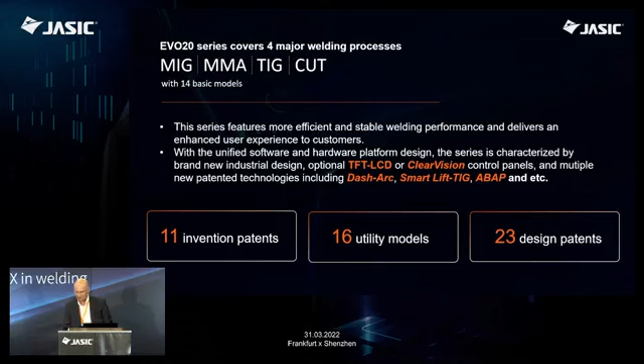Very important driver behind this development work was the human tech thinking. With the help of industrial design, the latest software developments, and the latest digital technologies, we aimed at creating an industrial design, user experience, user interface that will be the most modern, the most adapted in the world for welding needs.

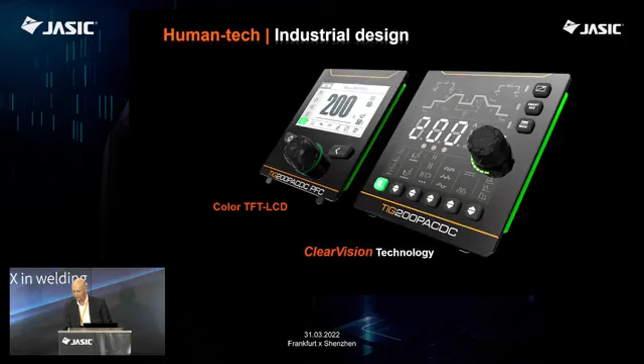We looked at how people look at the panels, the controls, how they use the equipment, not just saying it needs to be a little bit inclined. We actually asked the question, how many percent? What should be the slope? What should be the declination in order for it to be optimum for potentially as many conditions, as many situations as possible.

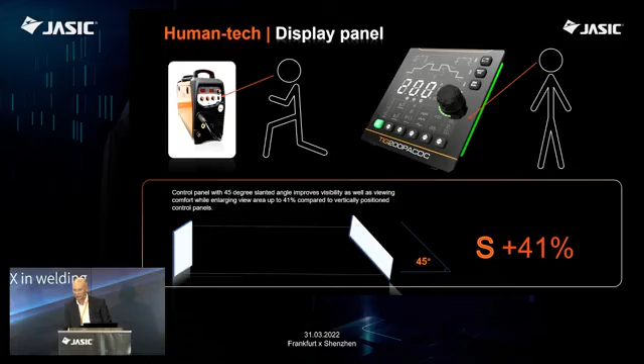A lot of attention was paid for the visibility of the parameters and controls. Welding is often done in dark conditions with the helmet on, with masks that are scratched, etc. Seeing is still very important because we know that a majority of welding problems happen with the start or with the ending. So the more visibility there is, the better it is.

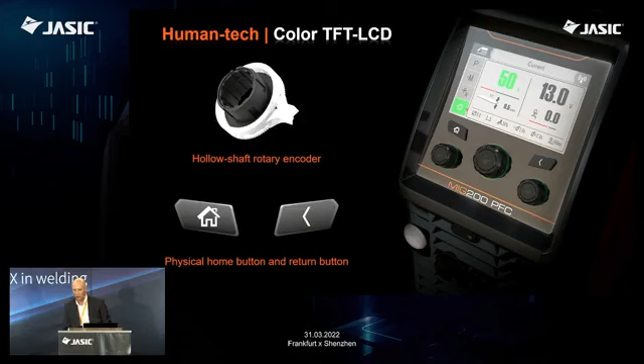High-definition digital displays are a standard in many products today. Why not in welding? But it's always a matter of pragmatical questions, and the conditions, etc. So there needs to be a choice between different kinds of applications, different kinds of technologies and different kinds of versions, if you will.

Remote controls have been around for a long time. They are wireless today, most of them anyway. Even the pedal can be wireless nowadays. And we offer a lot of different kinds of options for that requirement as well.

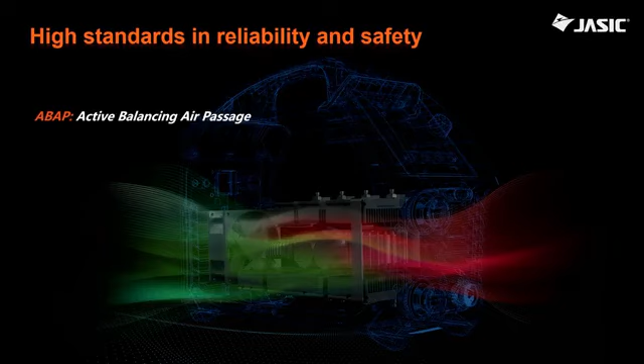JASIC has always had and enjoyed a good reputation in terms of reliability and safety. But development work never stops even in this respect. So a lot of new features, a lot of new innovations are in these products just to make sure that they will continue our tradition of high standards in reliability and safety.

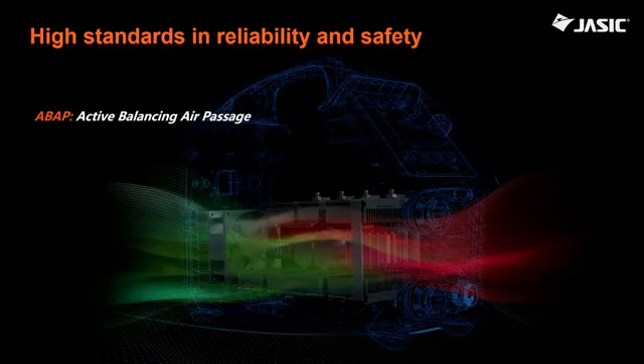It's true that single-phase products are easily transportable. They are meant to be used in different conditions, even outside, of course, with generators, and all the different applications. So when you design a top product, you need to look at it from all different angles.

Sustainability. Today on everybody's lips. What is sustainability? What is sustainable business? What is sustainable growth? It's not only the direct impact of your business to the environment, to the society, to the world, if you will. It's also the indirect little things that make a difference.

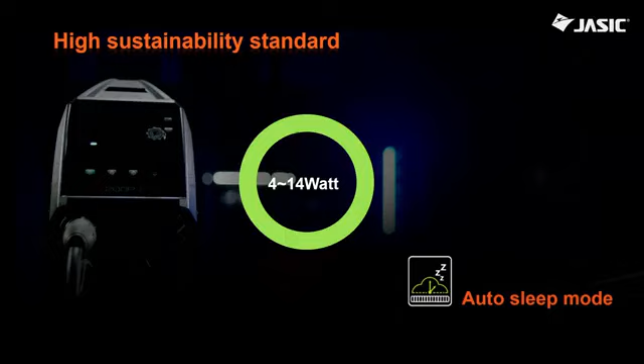The power consumption of the machine has been dramatically reduced when the inverter technology came about. But now we are even talking about LED technologies, new technologies that enable us to further reduce the energy consumption and thus the environmental impact. Auto sleep mode, an interesting one for panels as well, not just the ventilator, as it's more or less a standard nowadays. So there's always something more you can do if you want and if you set it as a target.

As mentioned, generator compatibility is very important. We don't control the performance of the generator, but we have to make sure that our equipment can work with as many generator models and variants as possible in a safe and reliable way.

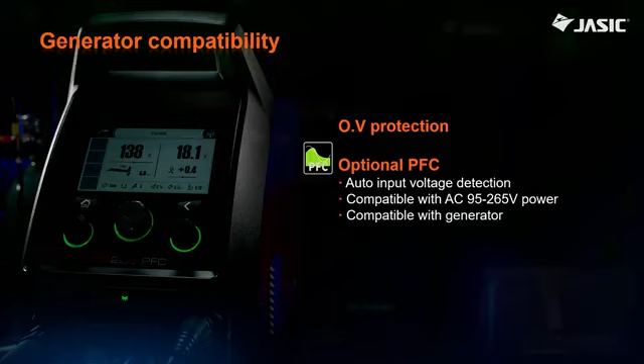Intelligent synergic control. Obviously, more and more of the development work nowadays happens in terms of software development. And it's a very exciting world for the future, because once you open the digital channel for your thinking, you know, only your imagination is a limit. But then you have to be pragmatic about it. What are the features that truly bring benefits, truly bring an advantage? And what are maybe the features that are nice to have but not the core, because you want to keep things simple, not to complicate anything for no reason.

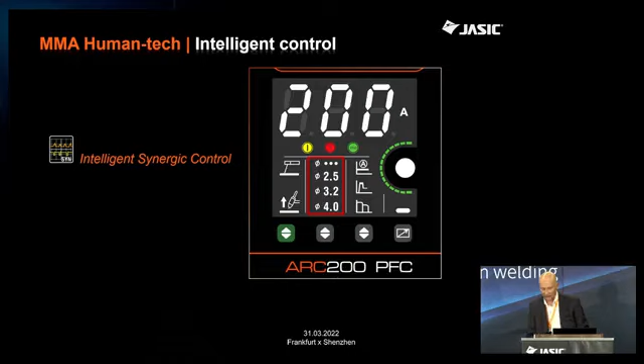A little bit paradoxically, I once had to raise a question with a bunch of RDI engineers from different welding companies that had come together to discuss the future of welding. And we agreed that one of the most important characteristics of a welding machine is how it welds. We sometimes forget this because we get fascinated about the components inside or some other features. But let's face it, a good welding machine differentiates itself from a not so good welding machine in terms of welding characteristics and welding results.

A lot of attention has been paid into this reality during the development work of the new series. And one of the best examples is the dash arc technology in TIG welding, enabling us to guarantee very precise, very controlled, very accurate ignition. And yes, like I mentioned, a majority of welding problems happen at the start or at the end. So that's why start is such a crucial moment in welding. And the better you control it, the better the result will be.

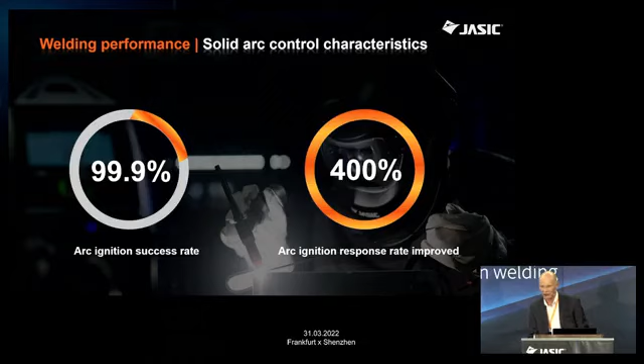So we're talking about a proven arc ignition success rate of 99.9%. I asked our engineers, is this about 99.9? And they said, yes, it's about 99.9. We can round it up, I think, almost 100% practically. So arc ignition response rate improved to, let's say, what is considered to be the standard and good, 400%. So we can play with numbers in different directions, but we are very close to saying that it is waterproof, maybe not a good terminology here, start and ignition.

Solid arc control characteristics. Once you have the arc burning, you need to stabilize it within milliseconds in order to guarantee a very good result. We know that the input voltage fluctuates, sometimes even quite a lot. We just talked about generator use, but the machine side technology has to compensate for those variations in order to guarantee the welding quality. And there are new innovations in this regard as well.

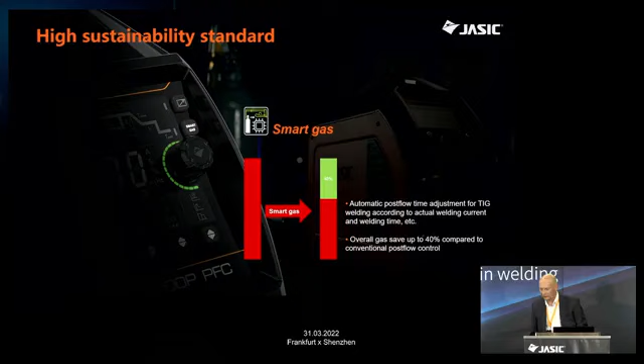Smart gas, automatic postflow time adjustments and other features that make it possible to save gas, to save energy, and to be more and more sustainable. It's the little things at the end that make the difference. And when you pay attention to the details, the total can make a big difference.

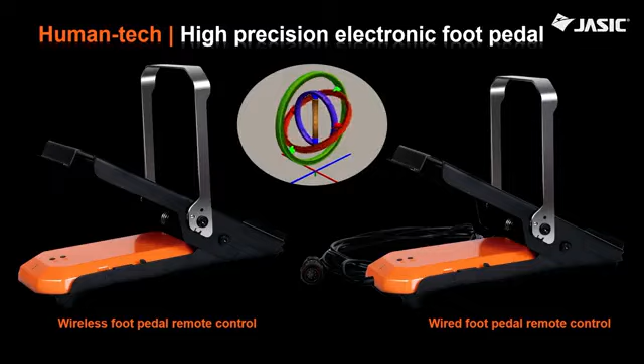We talked about the high-precision electronic foot pedal. Very neat application of the different axis logic here, and obviously a very big flexibility thanks to the idea that it's no longer with cables, it's a wireless device as we speak.

What is intelligent synergic control in MIG? It's first of all the basic characteristic of the MIG welding process, where a certain level of auto-adaptation happens while welding happens with the variation of the voltage. The machine tries to keep the constant voltage characteristics, compensates for arc length variations to a certain extent. And when you complete the picture with intelligent controls, sensor technology, then you start to get exactly what you want for each welding situation, each moment during the welding.

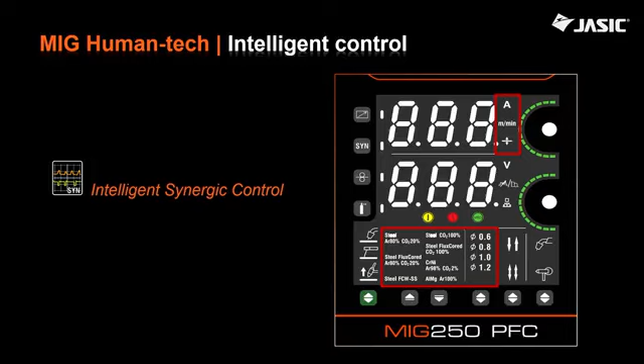You have to give some pre-information, but even that becomes less and less critical as the sensor technology advances and the equipment can actually make use of the sensor data about the welding environment and the required parameters. So there is a constant development here as well, and it is passionately pursued by the welding engineers who come up with new innovations all the time.

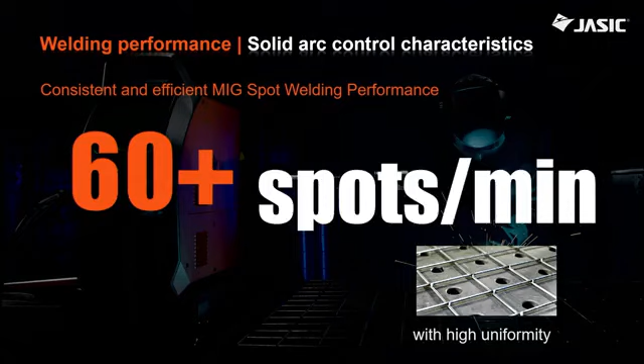Spot welding in MIG, 60 plus spots per minute with a perfect ignition. There are several applications for that, and it is very much appreciated if you can do it. And I don't think that it's been the standard of things in the single-phase MIG-MAG equipment until this launch.

Wire feeder cabinet in MIG. Many welders consider obviously the torch or the electrode holder as their tool. Moving back from there, the next device to come in MIG is obviously the wire feeder. The power source is the core and the heart of the system, but the wire feeder is a very important part of the entity. A lot of times, the wire feeding innovation is overlooked.

Sometimes it's about the reliability of feeding itself, intelligent feeding, variable feeding. But there are simple things, like making the change of the spool just a little bit easier by adding an LED light to be where it exactly needs to be when you are trying to introduce the wire in the new spool. So it's about innovation based on the welder. Making the welder's life a bit easier has a value.

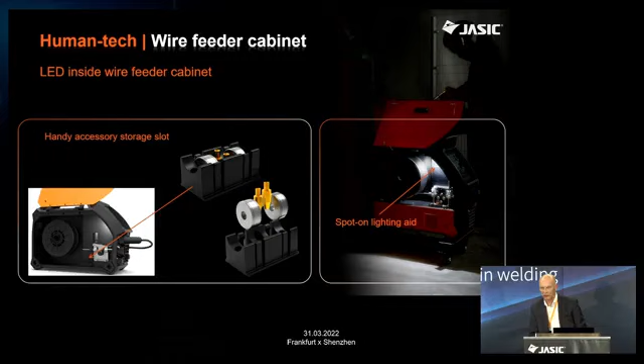For those who want to go far, we want to offer the opportunity and the possibility to go far. The so-called welding engineer mode makes it possible for the connoisseurs to have their own welding machine, and there are very versatile possibilities there. Quality welding has to be accessible for everyone, but those who want to go far have to have the chance to do that as well.

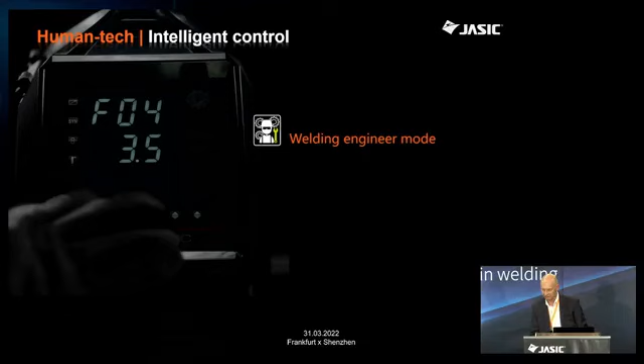Should something go wrong in that pursuit for excellence, you can always go back. Many people say the most important button on a PC is escape, or reset, or something like that. That makes sure that nothing breaks, nothing goes really wrong, but you can restart and do it over again. It's self-evident that it's there, but it deserves to be said, because a lot of times people are afraid of starting to experiment.

But we know ourselves, how many of you start by reading the manual? I'm not. I start exploring, I start playing with it, and that's at the end of the day the best way to get to know your piece of equipment, knowing that you can always go back.

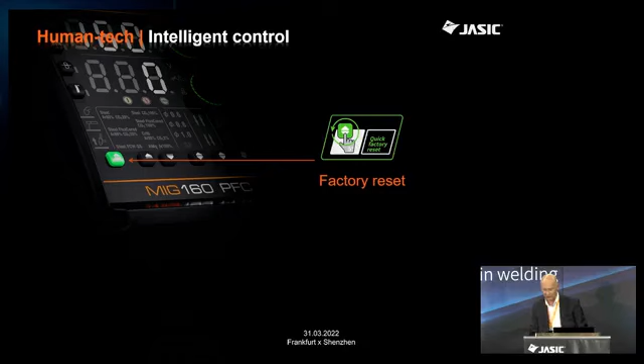To make the new range complete, there are two versions of cutting equipment, one with an inbuilt compressor. I believe that with these two products, we really round up nicely the whole requirement of welding and cutting in the single-phased part of the market.

And obviously, it's all in the torch. A lot of it is in the torch. So even the best power source doesn't help if the torch is not playing the same game.

That was a brief overview about the most important characteristics, some features, some benefits that go hand in hand in the new products. But I am pretty sure that you're getting more and more anxious to actually see the products and to actually see them weld.

So at this point, we're going to make a journey together, and the destination is Shenzhen in China, where we are going to meet the people who are behind JASIC, who are behind these great new products, and who deserve the credit for having created these things. So, ladies and gentlemen, please join me on a journey to Shenzhen, where we will be welcomed by the president and CEO of the company, Mr. Pan Lei.

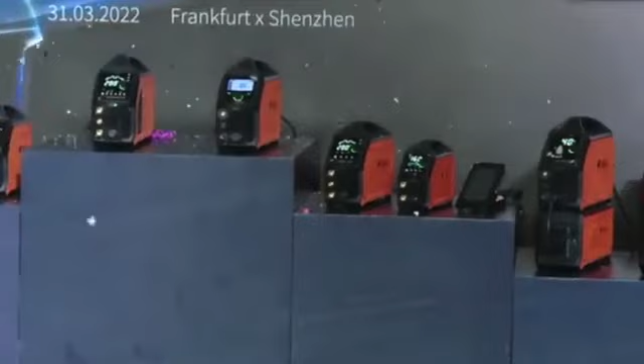In front of us is the time corridor of the JASIC Exhibition Hall. It states the development roadmap of the world welding industry, the China welding industry, and the growth history of JASIC technology. Since the establishment...

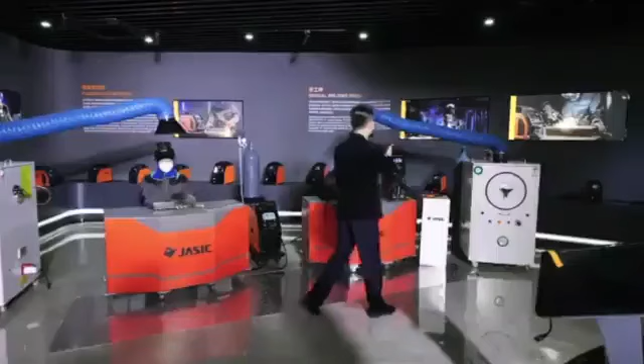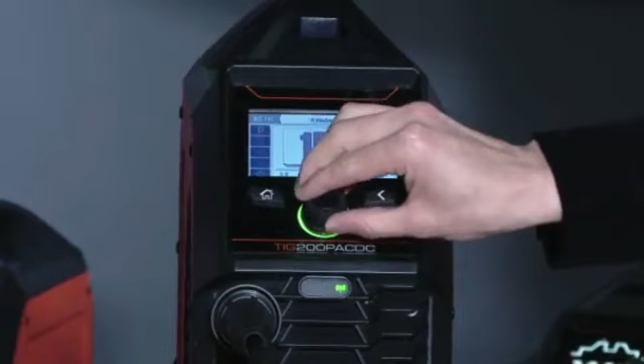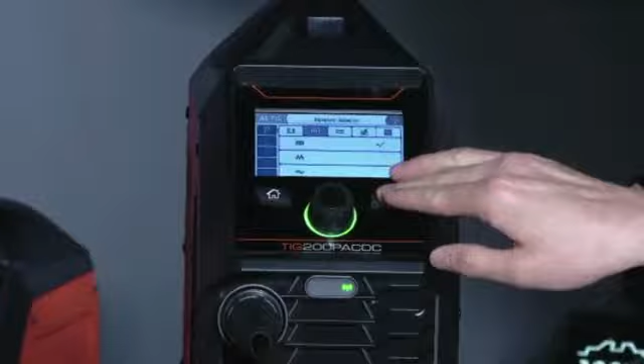Firstly, let's look at this machine: the TIG 200P ACDC. TFT LCD screens make complex operations much easier. The machine outputs AC TIG, DC TIG, mixed AC/DC TIG, and MMA. In addition, in AC TIG, three kinds of waveforms can be chosen: square wave, triangular wave, and sine wave. Multi-outputs enable your various welding demands for different weld materials and different techniques.

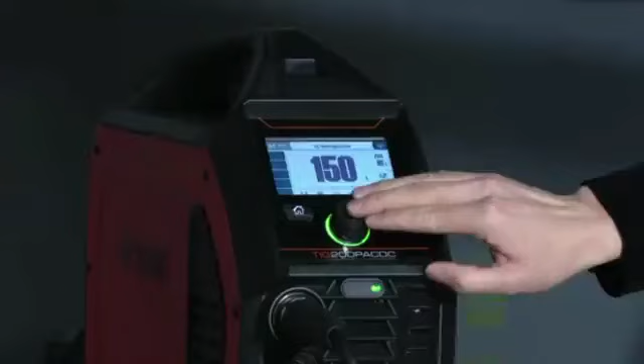Now, Mr. Wang is ready to demonstrate 3mm aluminum welding. Let me set the parameters. Select AC, 150 amperage, 80 AC frequency with 30% AC balance. The setting is ready. Mr. Wang, please.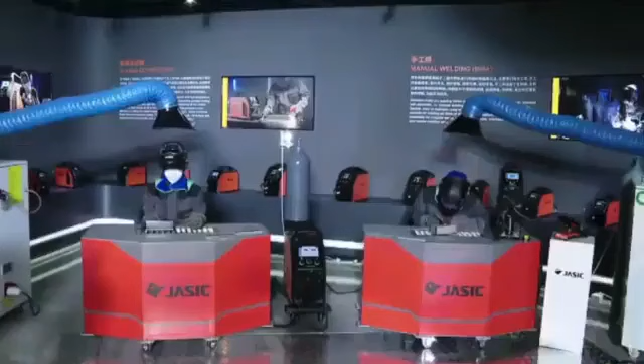Okay, let's check how the machine works. The concentrated arc and stable current result in flat welding beads and good shaping. Thank you, Mr. Wang.

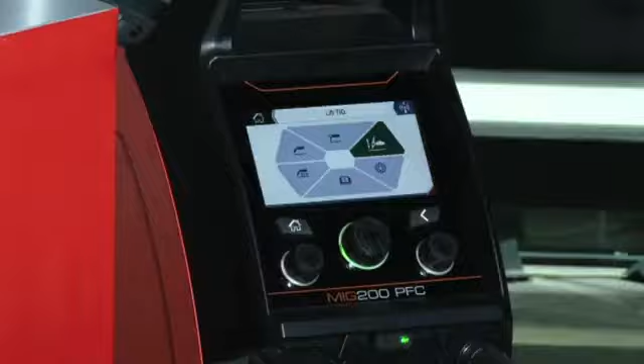While Mr. Wang is preparing for stainless welding, let's take a look at the MIG 200 PFC. A TFT LCD screen is optional as well. To let you weld freely as you wish, the machine outputs multi-process MIG, MMA, lift-TIG, and flux-core arc welding. Moreover, in synergy MIG...

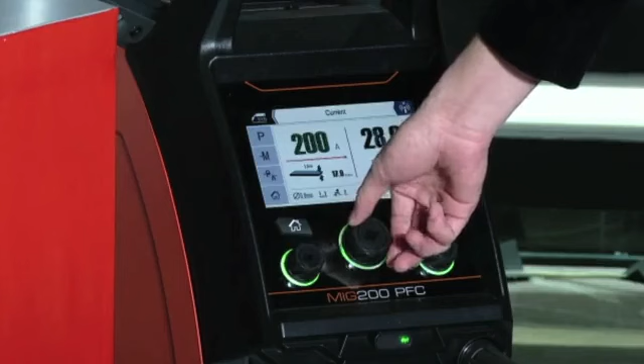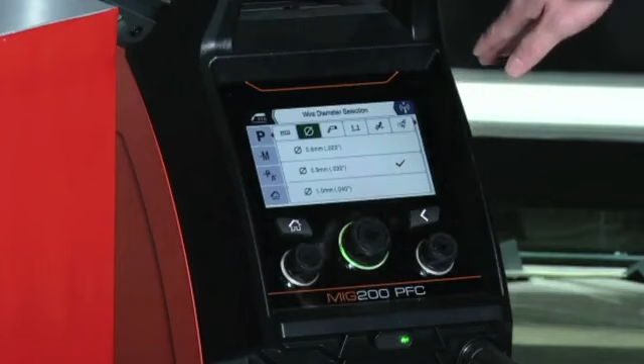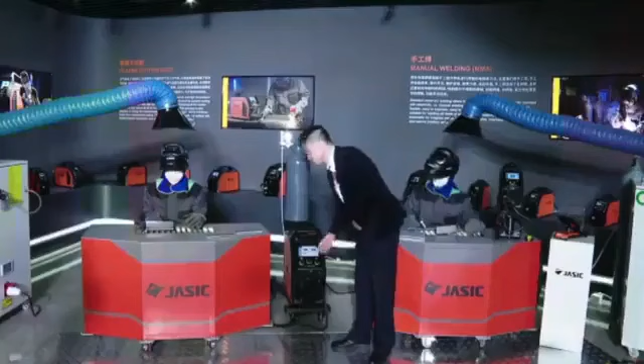The parameters can be chosen by easily setting. You just need to tell the machine what materials, shielding gas, and wire diameter you are using. The synergy control system will automatically feed back the suitable specifications. We just need to adjust either amperage, thickness, or wire feeding speed. A fine welding performance can be achieved very quickly and freely.

Now Mr. Chen is ready to weld an 8 millimeter flat billet using the maximum output of this machine. Mr. Chen, please.

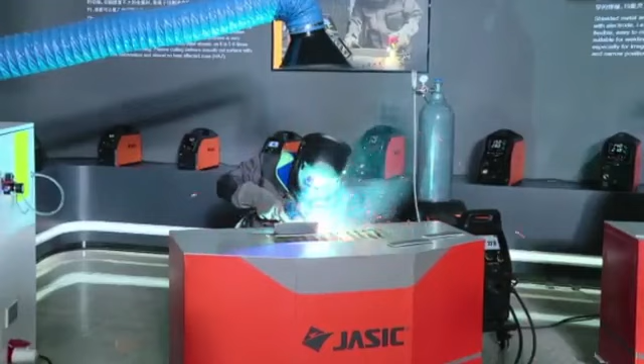Okay, let's check how it performs. There's good penetration and with less spatter. Thank you, Mr. Chen.

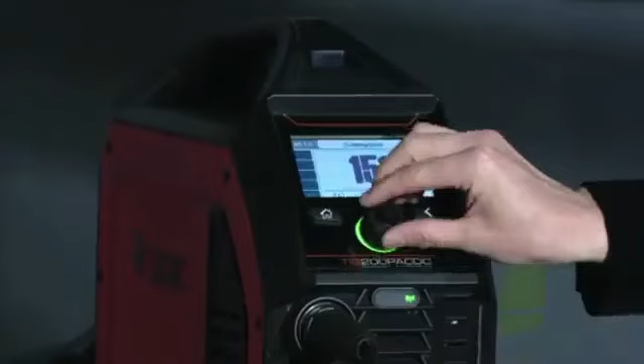Just now, we have checked the welding performance of aluminum for the TIG 200P ACDC. Now Mr. Wang is ready for stainless steel welding. Let's see how it will perform. Let me set it to DC mode for stainless welding. Okay, the setting is ready. Mr. Wang, please.

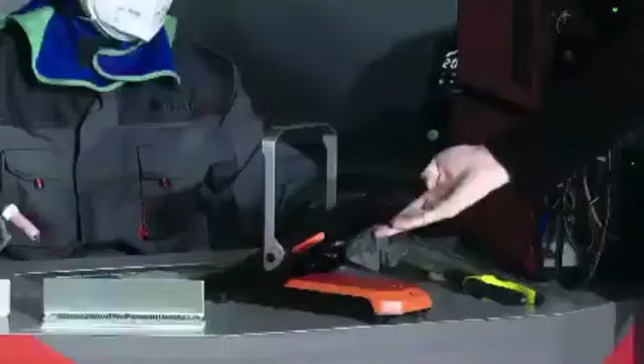EVO 2.0 brings us a new standard of user experience. We are passionate about your welding, thus we always put ourselves in the user's position and strive to work out a better user experience. One of the optimizations of the EVO 2.0 is the wireless pedal remote controller. A gyroscope sensor is used in the pedal remote controller, which is a complete electronic structure instead of a mechanical one. Better accuracy and much more lifespan ensure freely and stable control for your machine.

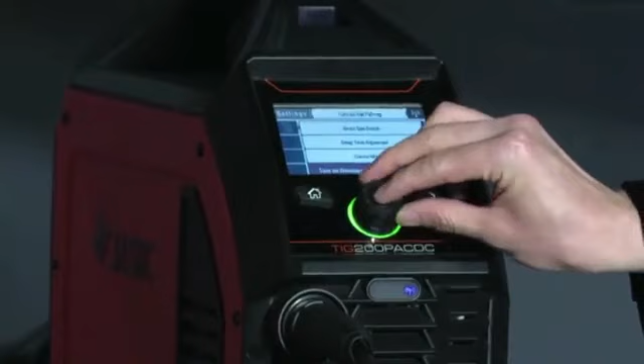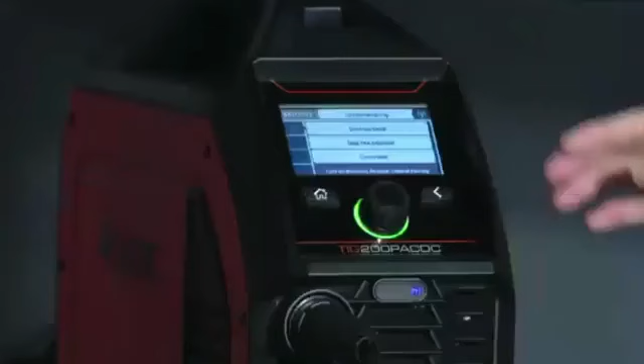Let me demonstrate how to connect it. Power on, select system setting, select user background, turn on remote control pairing, and press and hold the pairing key. Okay, just waiting. Okay, pairing successful. The indicator will turn from green to blue, which indicates that the connection between the remote controller and the machine is ready.

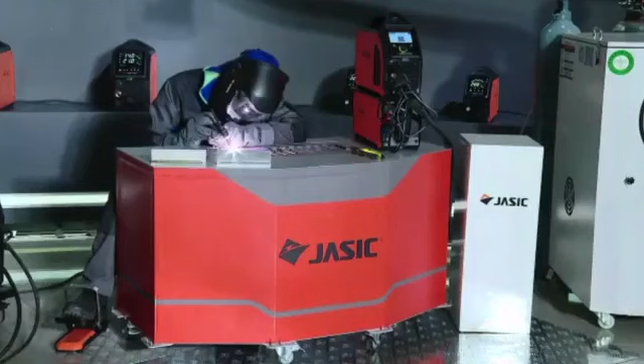Mr. Wang, please demonstrate how it works. Okay, as you can see, with the pedal stepping up and down, the current will be increased and decreased. Okay, thank you, Mr. Wang.

Another great idea for user experience: a wireless handheld remote controller, by which we can control the amperage and voltage freely, even when you are 30 meters away from the machine.

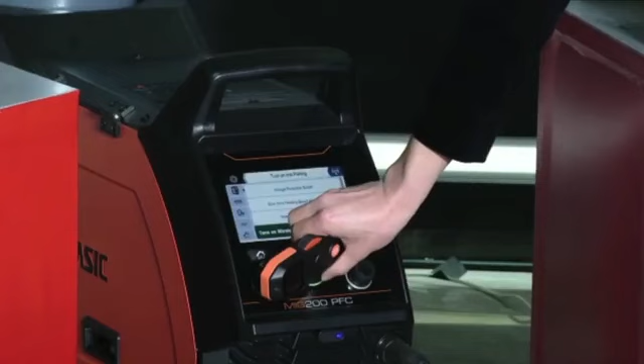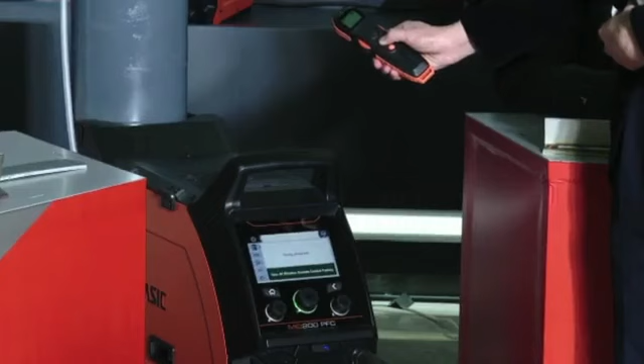Okay, let's turn it on and start pairing. Turn on wireless remote control pairing and press and hold the pairing key. Okay, pairing successful.

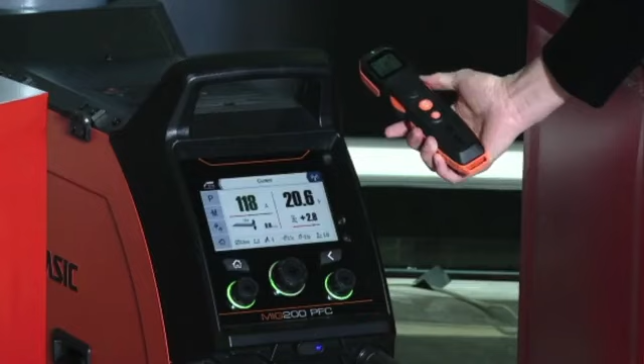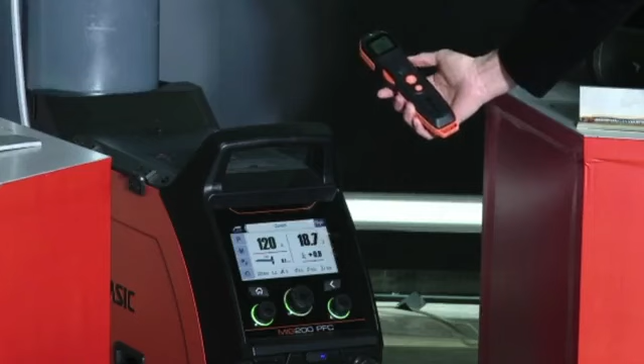Let's turn it. Okay, by rotating the remote controller, we can decrease or increase the current. Okay, let me set the current to 120. Okay, and select voltage, and increase and decrease it. Okay, Mr. Chen is going to show us a 1 millimeter carbon steel fillet welding with the current and voltage I just set. Okay.

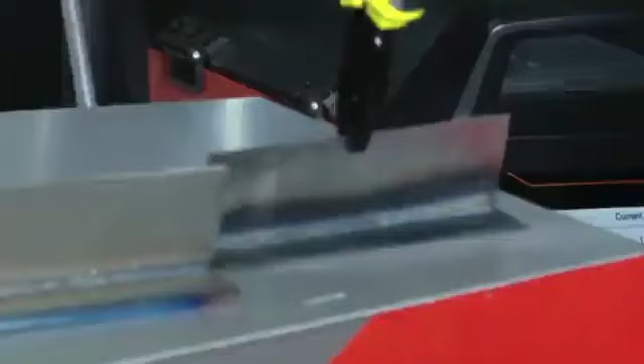Okay, let me have a look. It is good shaping with less spatter. Thank you, Mr. Chen.

What we saw is the demonstration of EVO 2.0 TIG 200P AC/DC and MIG 200 PFC. Thanks Mr. Wang and Mr. Chen for your perfect shots. Now let's give back to Frankfurt. Give the floor back to Mr. Anssi, please. Thank you, Shenzhen.